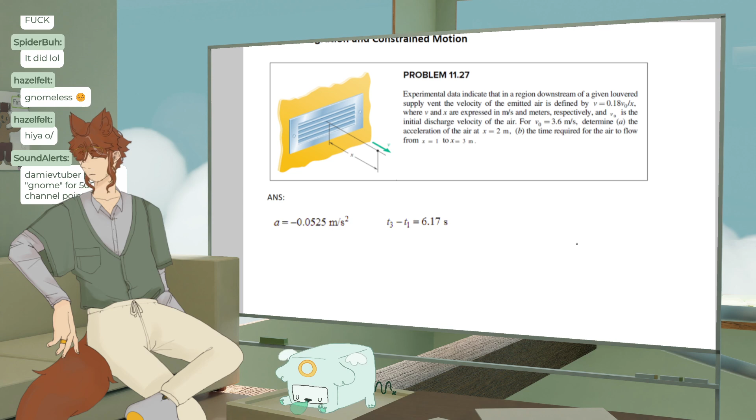Oh, Umbra, you have a question? What's your question? Umbra has a question. Anyway, hey everybody.

New quarter, new classes. How? How what? How did I get here? How did we get here? Great question, you have to go back a really long way to answer that question. We don't really know how the Big Bang happened, but okay, goodbye. Oh my god, Drown Him Friday. When? That's also a hard question to ask, but what is today? Saturday? Saturday at 3:35 p.m.

Oh shit, my Mix It Up is not up. Wait, you didn't get the full effect of Drown Him Friday. I also don't have any water. My god, Drown Him Friday Saturday, 3:35 p.m.

This is already so, you know what? This is just how it is. Here, I'll play it for you. You know, just because I'm the best and I care about my chat. There we go. That works. I don't have any... I have to go get water before I start... you. Fuck you.

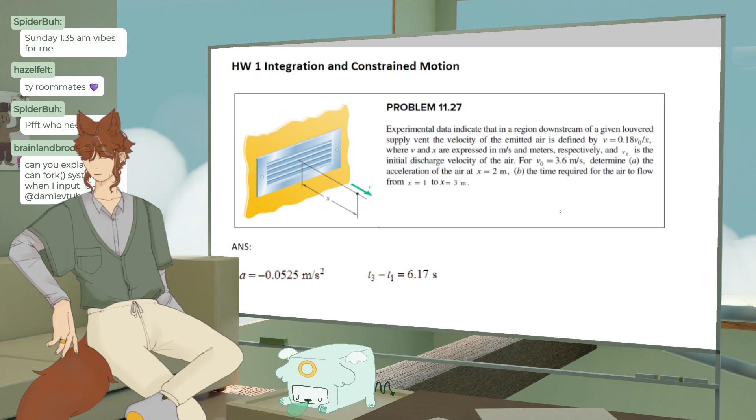There's a little bit of a primer about what this is. Let me explain what dynamics is real quick. So dynamics is like if you took your physics kinematics class, like your constant acceleration equations, and then you put those on crack cocaine, and you put calculus in there, and you just said, fuck it, let's just make everything a function. So we're just gonna have a lot of differential equations that involve derivatives that we define things as.

So our three equations are gonna be like: A is the derivative of velocity with respect to time. We have velocity is the derivative of x, position, with respect to time, and then we have a ds equals v dv, which you can derive from these two up here. So those are our basic boys, and we're just gonna get real.

Sounds like fun. It is actually kind of fun. You get real abstract with it, but we have this problem about a vent. So let's see, we have a region downstream of a given louvered supply vent, the velocity of emitted air. So we have a velocity function. It's based off of its initial velocity. So we could probably set that.

Oh, that's too zoomed in. We could probably set that initial velocity. We've got v equals 0.18 VO over x. So it also depends on its position. And we have an initial velocity, so VO equals 3.6 meters per second. We want to determine the acceleration for a certain position and the time. So we're going to do some integrals. Let's see, let me see Blake's question real quick.

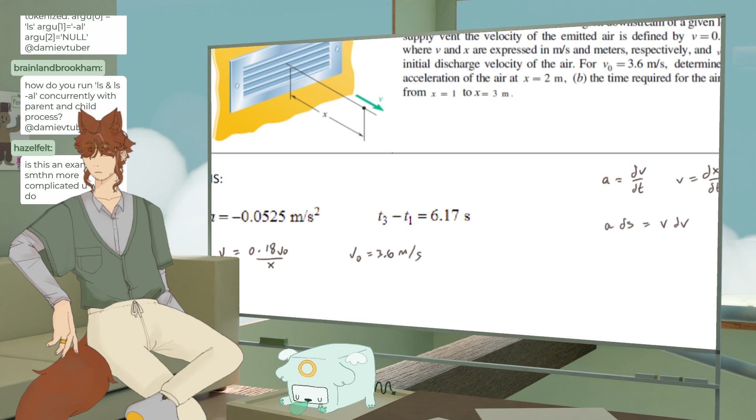Blaine? I just like to take viewer questions. Blaine is a CS major, I do a little bit of CS but not as involved as they do, so sometimes I just jump around. This dynamics problem is more complicated than some of the stuff up on my YouTube right now, because my YouTube is in the process of being caught up with the present day.

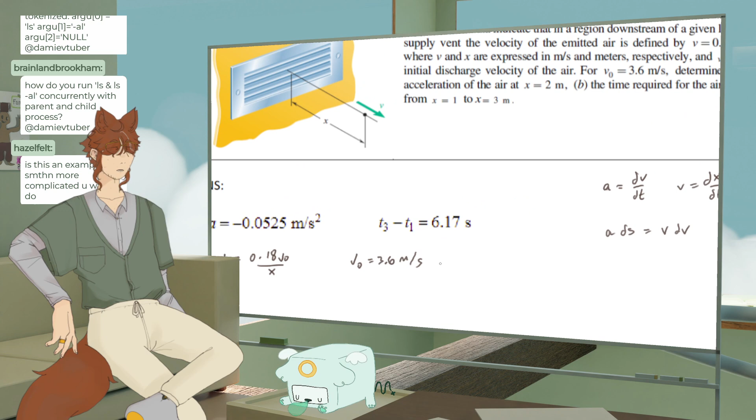Alright, so we're trying to find for A, we want to find an acceleration at x equals 2. We want to know what that is. So we know that acceleration is the derivative of velocity with respect to time, but looking at our equation here, we don't really have time, we have a position. So I'm going to try and do a ds.

Deemer, that's me. Hi Clem. I'm so sad I didn't get to stay for all your stream yesterday, I was called by the lions, by the actual real life lions.

Actually, we might need to do... No, don't be sad, it's okay.

Wait, if I take the derivative of this with respect to time, we would... Oh wait, big brain, never mind. I think we're chilling actually if I do this. A equals dv/dt, so if we take the derivative of velocity with respect to time, we would get...

So we have 0.18 V0. This is a constant, so we get 0.18 V0, or V initial.

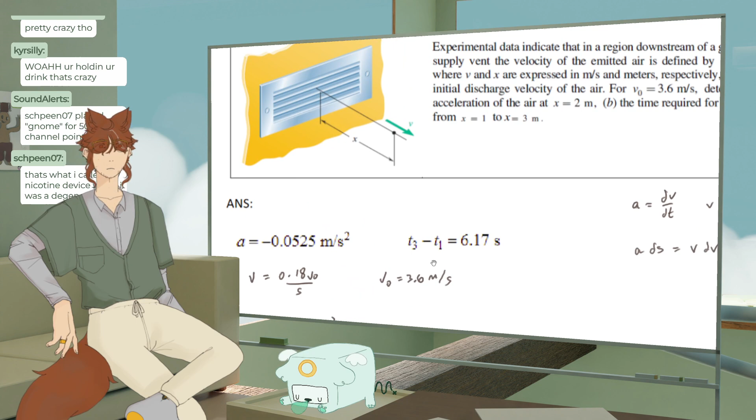Okay wait, no wait, for V0 equals that. No, we definitely need to get that V out of there. I'm not a fan of this V right now. Why is this so weird?

Because, okay, let me back up. Let's take it slow, we're getting through it. So to get to this place, we basically say okay, we take A, I think, and we say dv/dt, we're gonna multiply that by ds over ds. And ds/dt becomes v. So we get A equals v times dv/ds. That's the proof of that.

But when I was doing this on this problem, which we can check out, I was using this one. I was integrating it though. Also, you solve for k. I was pretty proud of figuring that out, but that's neither here nor there. Not a particularly impressive revelation, but in my heart it was impressive, and that's kind of all that matters to me. So this one I was integrating, and A was a function of velocity, and so these V's kind of scrunch into each other and create that function.

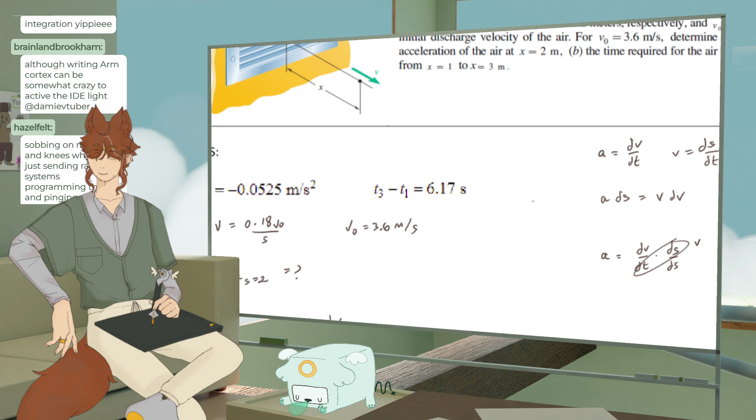Sobbing on my hands and knees while you're sending random systems programming things and pinging Damie. This is just how Blaine is. It's funny because Blaine has been around for a while, not just some random person. Our degrees matched up pretty well for a while, but after a point, because I'm mechanical engineering, his software degree is a lot more software-focused, since you found my math streams and we were doing very similar things. But yeah, I just think it's funny. Uh-oh, I got a negative seconds. That's not good.

Oh wait, okay good, it's just asking about the delta, so T3 minus T1. This is Brandon's thing since forever, it's beautiful. Yeah, I really think it is beautiful. I mean, and I can, because I'm pretty good at coding.

I'm pretty good at navigating the internet alleyways, so to speak, of how to find something. So even though I can't answer the questions, I can give some help. But I like hearing what he's working on always. And honestly, if you're in any degree, I always like to hear what people have to say about stuff.

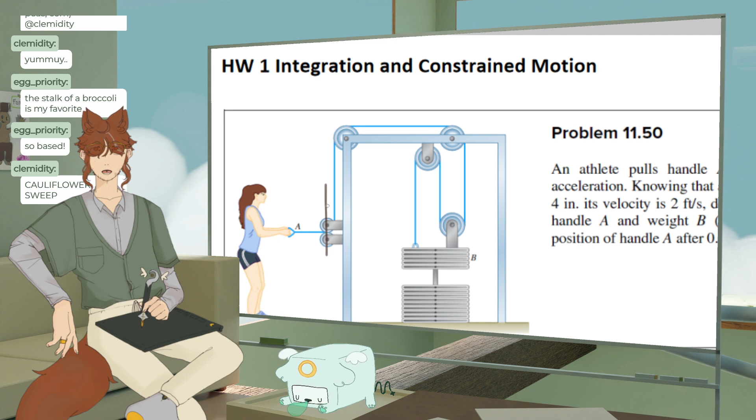So this is a type of problem called, is cauliflower better than broccoli? Oh, that's a take for sure. I'm not sure, cauliflower is just the broccoli stem, but all of it. The cauliflower I had was like, it was fine, it was very close to broccoli.

Potatoes are a classic, but potatoes are not a vegetable to me. Potatoes are like a different thing. Potatoes and corn are kind of both in the non-veggie space to me. Maybe that's just me though. Potatoes are like a pasta but from Mother Nature. That's so true.

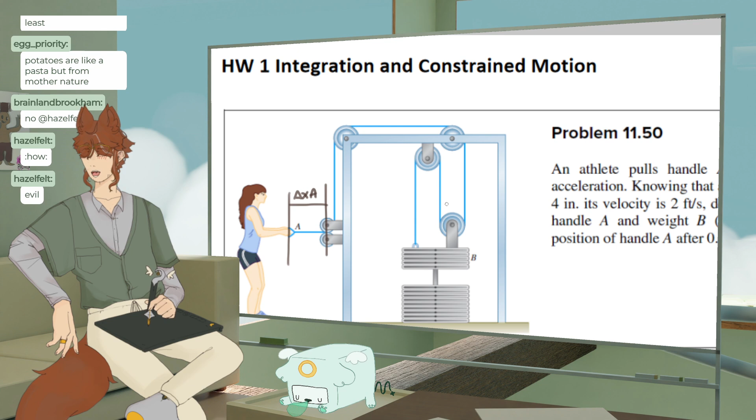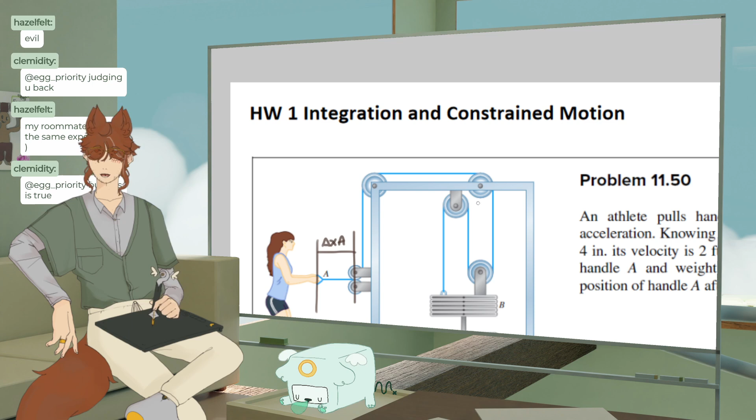Did they make you take a C course beforehand? No. Blaine's college also doesn't teach him anything. He has all these weird online classes that don't teach anything. Right? Am I incorrect about that? I think I remember this.

Okay, yeah, this is gonna be what kind of determines the... is it?

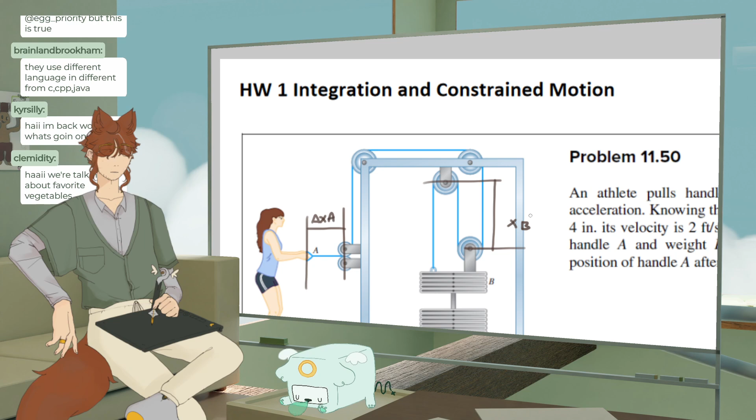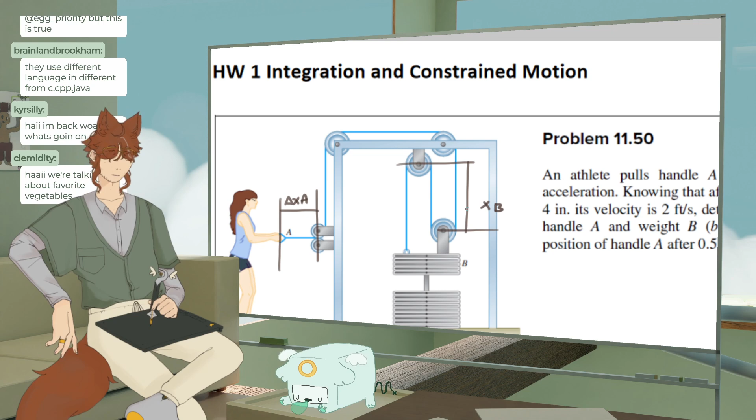I'm back. Whoa, what's going on? We're talking about favorite vegetables. I'm also doing a problem called a constraint problem. It's about sort of taking variables and having their relationships with each other.

Some people are experiencing the joys of college and the joys of adulting, and the costs. It's hard because I'm weird, you guys know me. I like thinking about math and stuff in a weird way, and it kind of sucks because no one in college is weird. Everybody is really boring, and they're like, I like math because I like putting numbers in a calculator. And I'm like, no, I need the numbers to kiss, okay? They're like holding hands and they're frolicking. Oh yeah, and Damie's doing math, I guess.

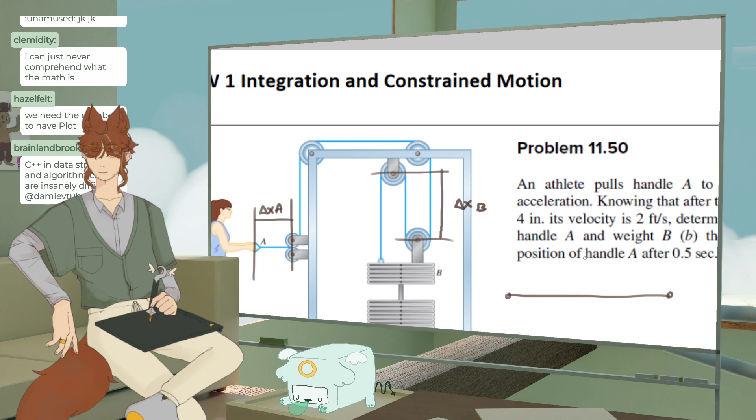I can never comprehend what the math is. It's okay, this one is kind of really weird. Basically, the idea is that the foundation of this logic is you have a cable in this problem. You need the numbers to have plot. You have a cable in this problem, and when you pull on one side of the cable, the rest of the cable will get shorter.

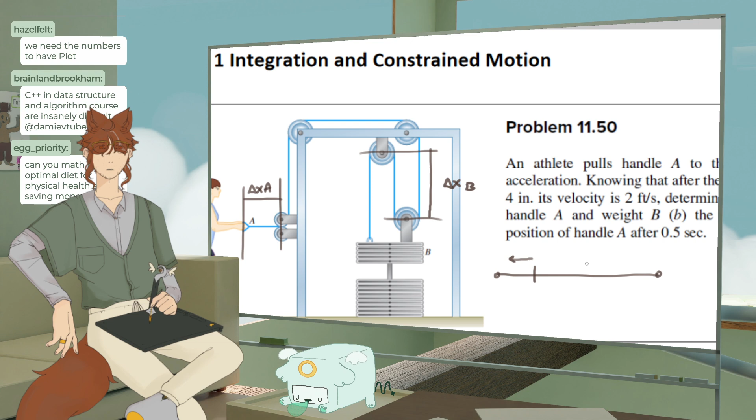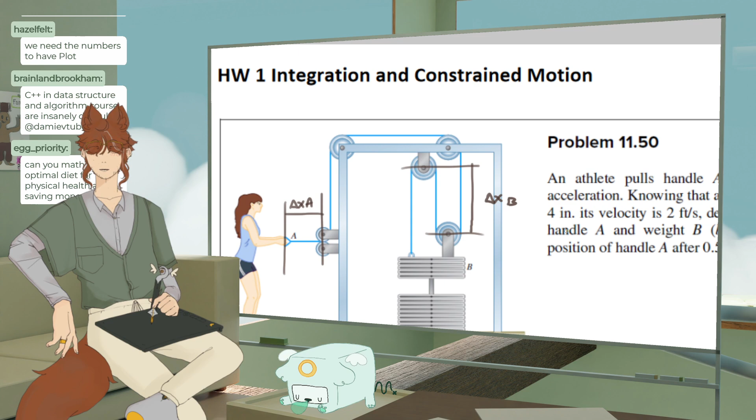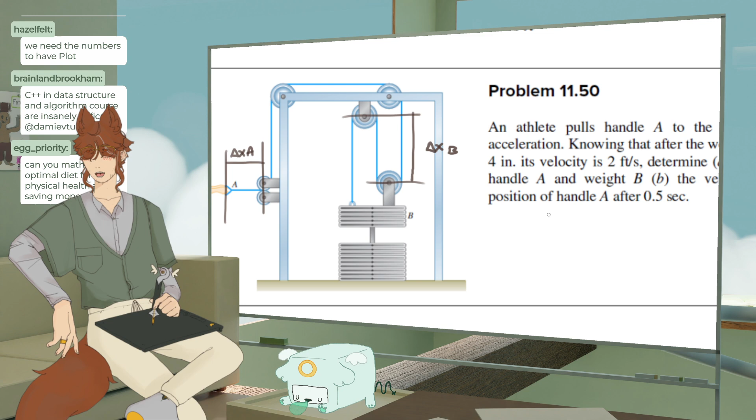Can you math me the optimal diet for physical health and saving money? Oh god, cost analysis is not my forte. I'm like the kind of guy who's like, you know what would be really cool? What if I designed a fridge that had a glass front and stuff, and it was small, because that would just be such a cool item to have, and then I don't think about how much that would cost, and I just don't think about it. And then it never happens because I hate cost analysis.

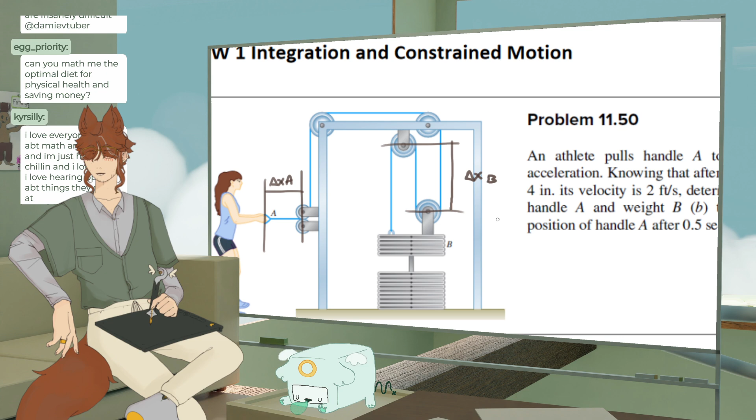I love everyone talking about math and stuff, and I'm just here chilling, and I love this. I love hearing people talk about things they're good at. Yeah, I love that too. I like it when people come in and talk about their majors, especially because I'm not actually a math major. I'm an engineer, so it's really cool to hear math majors talk about stuff too, as we get a lot of math majors.

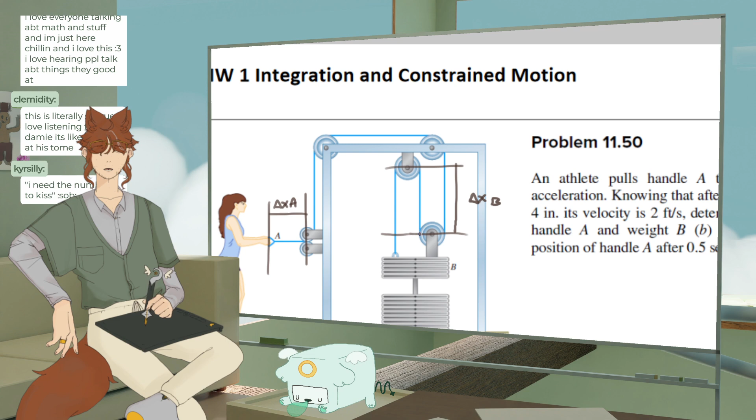It's like a wizard at his tome. I love that. That is exactly when I was like, okay, how do I kind of think about how I would teach math to people? It's literally just alchemy, that's what I think of it like. It's like, okay, so we have this problem, and we're gonna do a spell on it, okay? We're literally gonna do a spell where we say, alright, we have 3 of these distances. We're putting this in my wizard's brew. The length of this rope equals the distance of X sub A, plus 3 of these distances plus other stuff, and then that's our fun potion.

Like, if you shave off your apartment's drywall gradually so your landlord won't notice. What is that in relation to? Damie Arcane Wizard Arc, exactly.

Do I have a GitHub page? I do, but there's nothing on my GitHub. Oh my god, so really funny story, I have a video game that I made. It's a small video game, but me and my bestie in high school, we took a year and made a video game for one of our senior things. And that's like the only thing that's on my GitHub page, I think, stuff from that era.

It was so funny because it was a pixel art game and I was sharing the files over Discord for the art, and we put them in Unity. We were using Unity and I was like, why are these so rasterized? Why are these pixels not crisp? And it was just Discord compression. So we were like, okay, we're putting them in GitHub again.

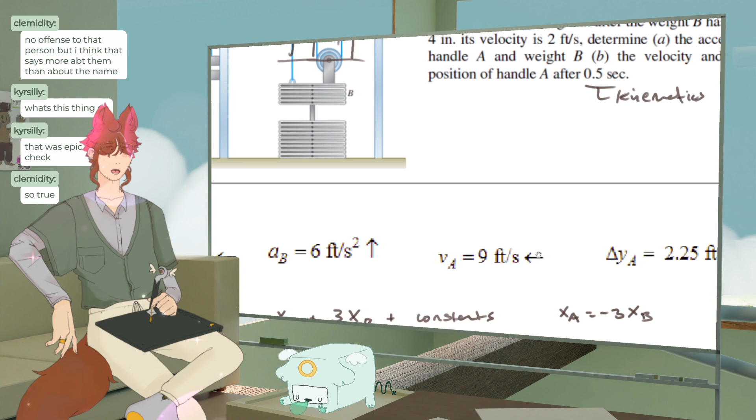Because the only thing I was tripping up is the length. But essentially, XA equals -3 XB in terms of the chain, like in the delta. Because when you do the delta, yeah, so when we say the delta of stuff, then we would say length minus length. Maybe not, don't - this is right, I think. Okay, so delta XA equals 12 inches? Feet? Inches. Okay, so now we have to convert things.

The delta is that, and we know that the velocity is VA equals -6 times 12 feet per second times 1 foot is 12 inches - not really how I should write that, so write it over here, 12 inches. Okay, and then we have kinematics.

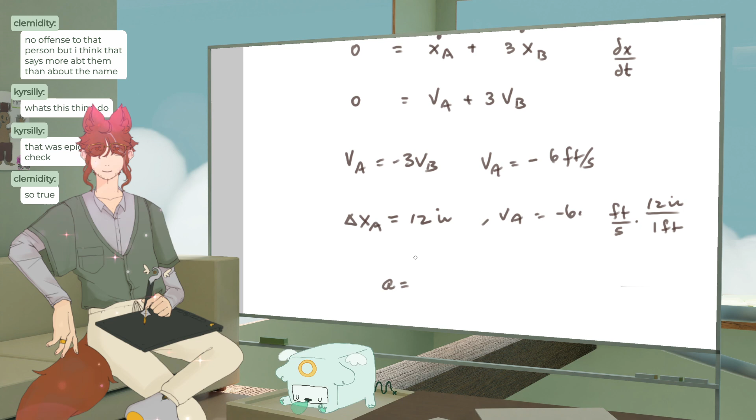So A equals... my brain is not working. It would be over here that I wrote this down. I think it's the change in velocity over the change in... I don't know. Don't look at me. POV, I just turned my paper right into your face - you're studying next to me and I slammed my paper right into your face.

Where did I write these down? Oh, right there. V minus V0 equals A times T. Wait, but I don't know how long it went for. Wait, okay wait, I remember - I'm remembering, it's this thing where we only have two, and... I've gotten worse at explaining things. Constant acceleration equations, there's one equation which is this one: V squared equals V0 squared plus 2A delta S, delta X - I've been using X in this problem. We can use this one, I think.

This will be 6 times 12. 5 times 12 is 60, right?

Literally so sparkly. I love being sparkly. I enjoy being sparkly and evil at the same time. That one's a fun combination.

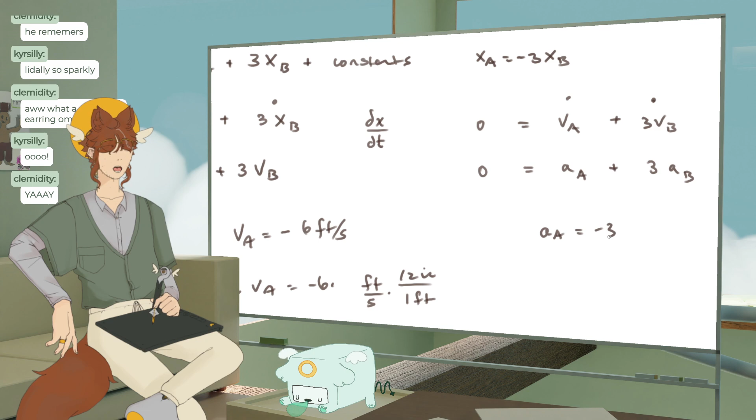So smart, Damer. Sorry, I'm a laugher. I'm the smiler, the sniler. Your little gremlin laugh, my One Piece laugh. That's what my One Piece laugh would be.

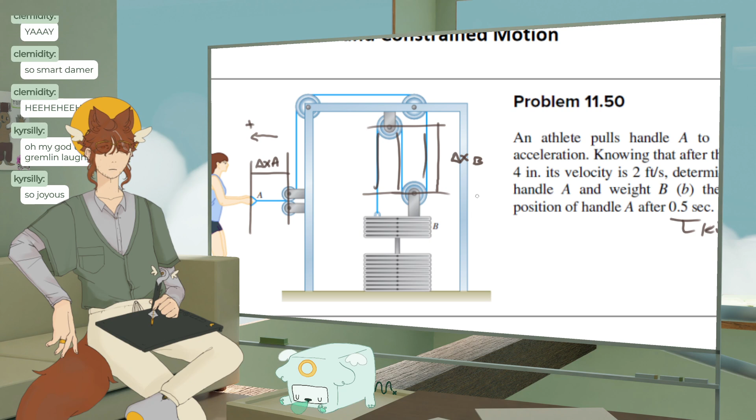Okay, so I can't use negative, because in this sense, this is positive, which is kind of odd if you think about it. I don't know how much I like that, actually, I feel like that sucks. So joyous, so joyous. That's positive, and then as you pull that way, then B would go up, so up is also positive. So if B is speeding up, it would go up. Yeah, okay cool, this is why the sign thing is weird.

Can I be a hater for a second? Okay, I'm gonna tell you guys some inside jazz.

Well, let me be a real hater on main, okay? So, I was in statics, right? Statics is about, like, you take a body, some sort of thing, I don't know, it could be me. That's me, apparently, okay, that's me. You take something and you put a bunch of forces on it, and you like do stuff to it, and you could like spin it around or whatever. And you're trying to figure out, like, okay, if we want to put this and have it not move around, like have it not translate or have it not rotate, then what sort of extra force do we need to have to keep it there? Or sometimes it'll be like, this is the direction of the force and how big is this force, right?

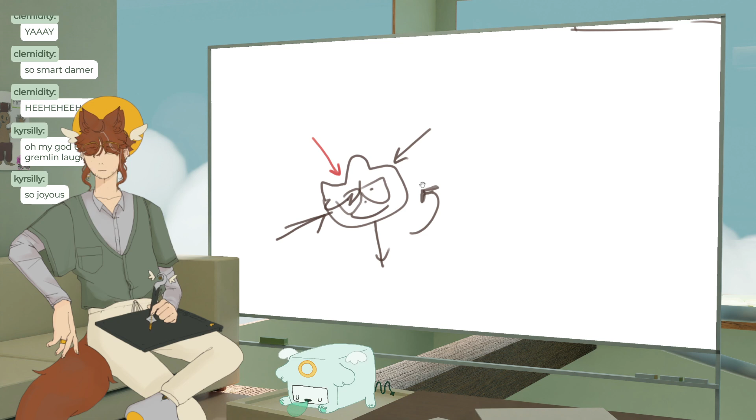And my professor, God bless his soul, he told us, okay, when you have a free body diagram, try and draw the arrows in the correct direction. So if you think the normal force is going up, don't draw it down like this, because your math is going to be weird, so try and draw the arrows in the right direction. The only time he told us ever to not do that was when we were doing trusses, and if the truss looked like something really weird or really bad, he was like, just guess and say it's one way. But if you're doing a joint analysis and you have a thing here and a thing here, and you're trying to figure out which way this force is gonna go, usually a lot of the time it's like this, one force, right? There's a load on this, and it's kind of like a triangle or something, and you're trying to analyze this joint, and you have these two forces. It's like, okay, so this one has to go down, so this one has to go here, and then this one has to go here, right? You're trying to guess the right way.

The two classes I have this quarter, I have this class, which is dynamics, and I have this class called, it's a civil engineering class, called Mechanics of Materials. The Mechanics of Materials class is basically about, like, if you have a really thin, long thing, and you put a force over here, how much it becomes goofy, how much it deforms.

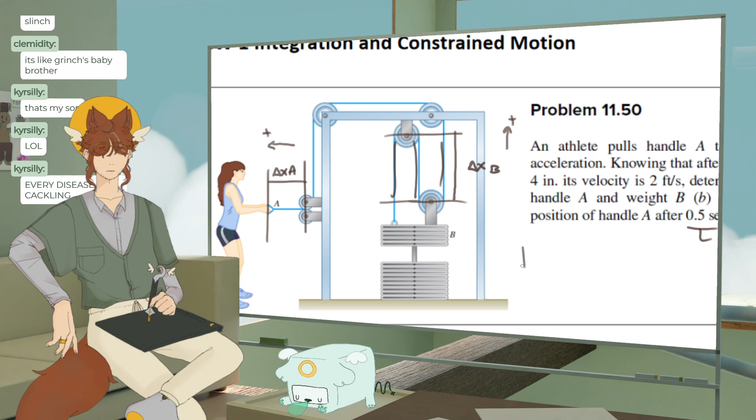I don't know why they said delta y, because why would that be y? Why, that's the evil axis. That's literally the evil axis. This is always x. Fine, I'll do this. There we go, delta x. I don't know why it said y, that is evil. Feet left.

Please don't kill Slinch, let him live. I hope your professor loves it. I feel like my professor would really...

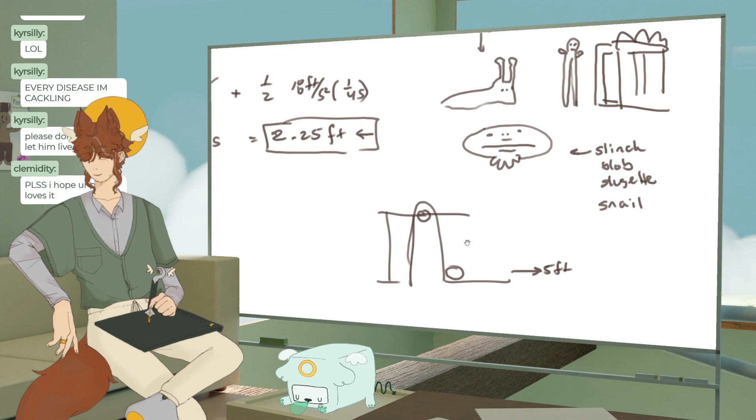It looked like this. So the cable went around a pulley, and then it went around another pulley. She was like, okay, what's the distance, if I pull this one 5 feet, what's the distance that each of these changes? And we were like, 2.5 feet, because you take this change and divide it by 2. And she was like, no, it's 5 feet on each one. Then she was like, wait a second, let me check my notes. And she was like, no, it's 2.5 feet.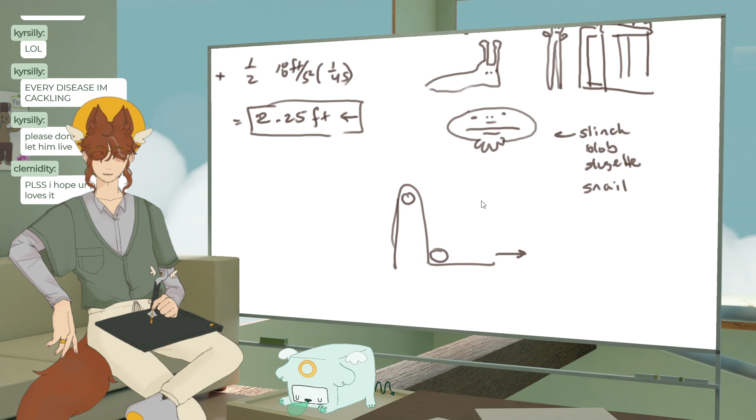It's literally a mistake I would make on stream. She's great, I love her. It's also just nice not having like a 72-year-old white guy as professor.

I think she would like Slinch. I hope she does.

Oh my god, yeah, we had an in-class test thing, and she set the password as this, like an evil emoticon face.

She's also the same professor who made jokes, because it was a detailed drawing class, so we had to do Slinch has every disease. He does, unfortunately. Not like my other awesome son, Skin Boy.

We had to do a lot of tolerancing, like fit calculations, which implies a hole and a shaft.

There was one day where she was just like, guys, I can't make this funny, I gotta make a hole joke. And we were like, oh my god. She tries to make little jokes and things. She's so Twitch streamer, it's awesome, I love her.

I don't even care about the dynamics part. Although it was really funny, the other day she was trying to explain acceleration to us, and I was like, I think we know what acceleration is, Professor.

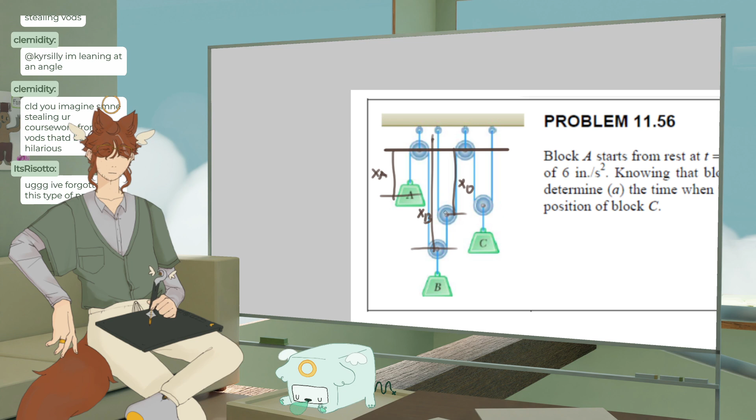So this thing is gonna move. It's gonna have a position. I'll just call this X. Call that 0. And then C is also gonna move.

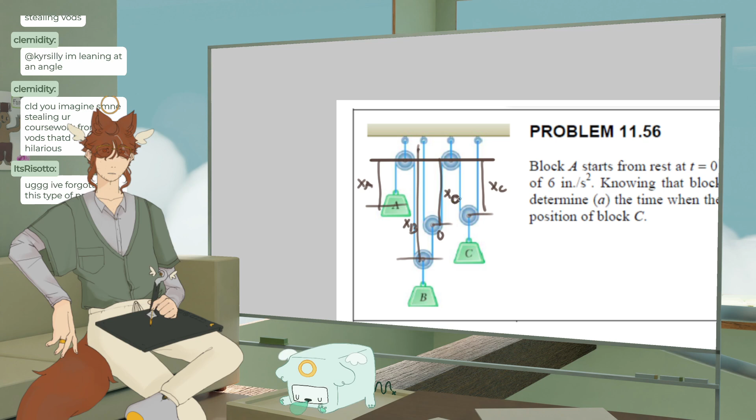Just so you know, we get some terminology in here. Alright, so now we have to write the dependence relations. So let's start with, we got 2 cables. Let's call this one 1, and this one over here 2.

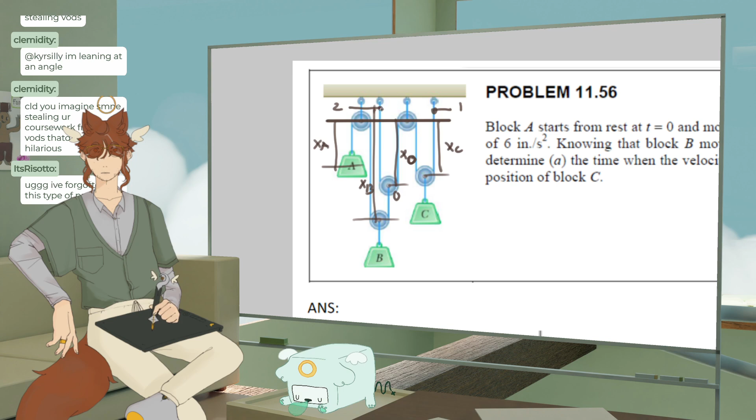Bad, wow, this looks bad. This looks unfortunate. There we go. That's a little bit marginally better, but it's pretty bad. Yeah, now see, I just pointed at the same one. That's not very good, is it? There we go, that's 2.

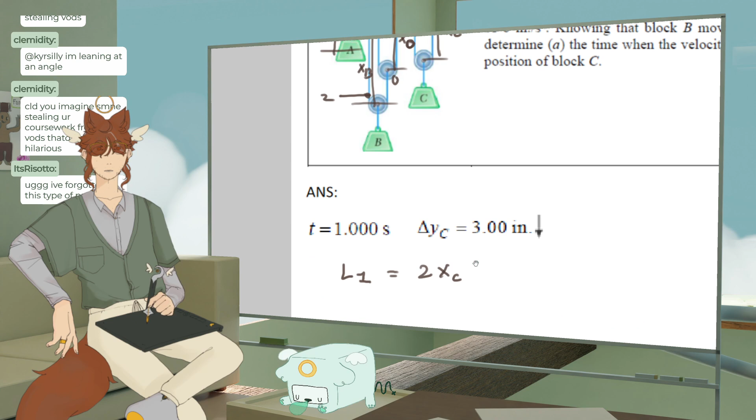Okay, so we're gonna say L1. So what things do we have to add to get to L1? Well, so C is gonna change position. This is always gonna be a constant distance, so we don't really have to care about that. So C, that's gonna be 2 LC, right? So we go here and then we go here, so that's 2 of the LC, so XC. And then we've got this length here, which is going to be D, and we got 2 length D, XD.

Can you get a screenshot of Slinch? Yes, 1 second, let me go back to Slinch for you. I cannot believe you want to draw Slinch. He's scary, I don't like him. I have a lot of creatures that I employ on my channel, like this fellow. I can't even draw him very well because I feel like he's going to come back and then we have to burn the whole place down again. So excited to see Slinch fan art. You don't like him? He scares me. He scares me. I've never used a Slinch before.

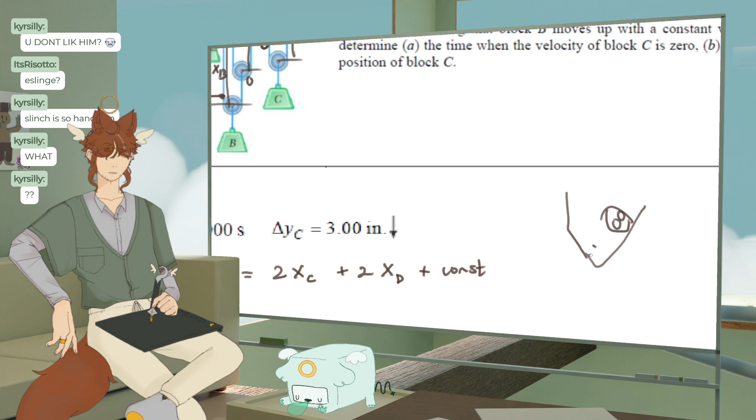Although it is a very fun name to say, and I do enjoy it. Slinch is so handsome. Okay, sure. Can we get like yaoi fan art of Slinch? Like drawn in the yaoi style, just really shoujo it up, you know, like, oh my name is Slinch. I'm going to my first day at high school. Sorry, I have to get his lips in there because that's Slinch. He's bald because he has no hair. Zero hair.

Thinnest neck you've ever seen. Biggest hands you've ever seen. You know, Slinch, my son Slinch, who I hate, who also has every disease. I don't think those two are related. The disease thing happened after.

Let me DM you some. I never, it looks like the Horse Guy visual novel. Can we? Oh my god, Slinch redraw please, over the Horse Guy. I forgot about the Horse Guy. I can't believe I forgot about the Horse Guy. He's awesome. What is that called? I know exactly what you're talking about. Horse Guy visual novel, it was a game, right? Or are we talking about the same thing? My Horse Prince. Yes, yes, yes. Wait, it just autocorrected to horse and gay visual novel. No, My Horse Prince, please. It was not gay, actually, it was very straight. This guy.

That handsome Slinch. Wait, why is it not letting me write? Slinch. It's exactly him, except he needs to be bald. My spirit animal, the Slinch. I love this animal, the Slinch.

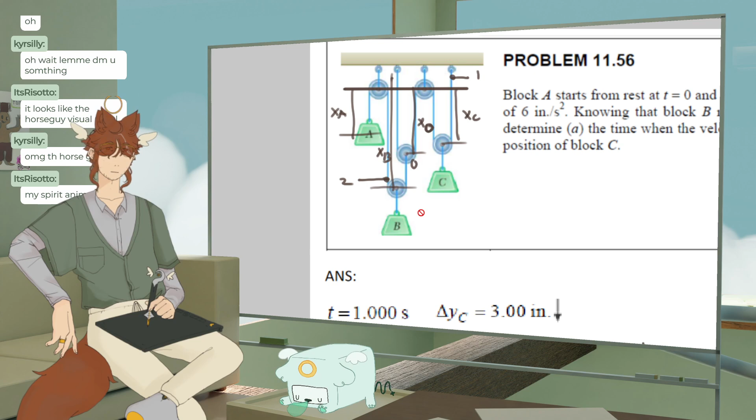Okay, so this length is gonna possibly change. That's xb minus xd. xb could also change, unfortunately, but we'll go with this for now. So xb minus xd, oh, I might need to have an overall length defined? Maybe not, we'll wait and see. We got xb, oh sorry, xo.

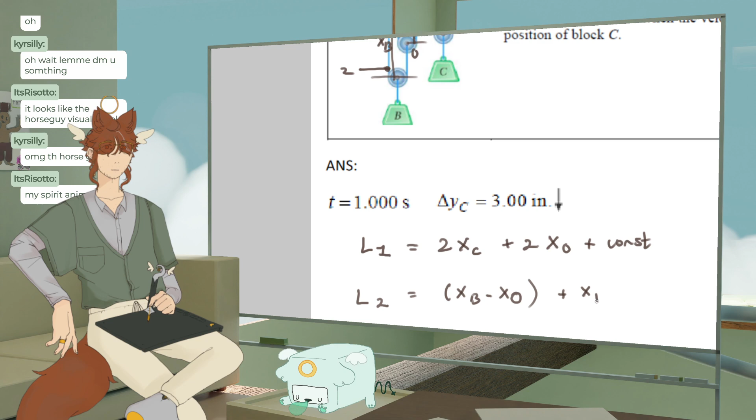That's not xd, lol, me confusing myself. That one, and then as we go up here, that's just xb. Oh no, we don't, I'm chilling. It's just gonna be 2 degrees of freedom, because, okay, it's kind of funny, because the way they described this... I actually don't know if linear algebra is a prereq for this class or not, but basically the way that I think about degrees of freedom is like, okay, if you have, like, you know...

Because this is gonna be xb plus xa, right? This is our dependence relationship, it's gonna equal 0. I'm gonna just put c. Why am I gonna write constants? Get out of here. Actually, I'm probably gonna forget to write it if I don't write constants. Whoopsies, remember your c's and your integrals, guys.

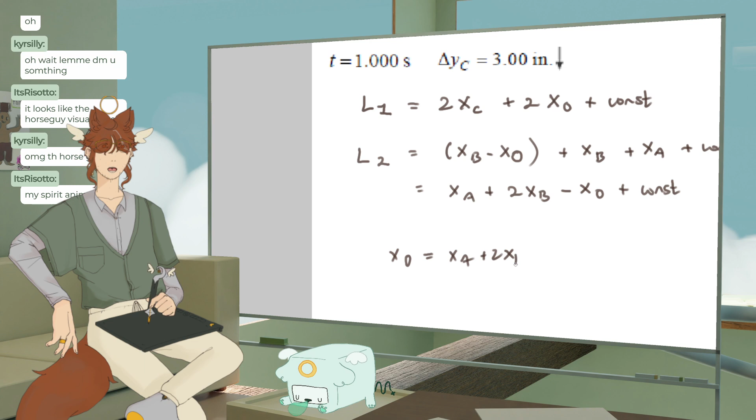Yeah, so if we write this out, we can say xa equals negative xb, well, this is 2. And I'll rewrite this, let's do that first. So we got xa plus 2xb minus xo, it's constant. So we can say xo equals xa plus 2xb, and because these are the 2 degrees of freedom, that's why it's 2 degrees of freedom. That's how I remember it, at least.

You have like 2 vectors that make up your... so if we were doing this linear algebra style, it would be like 1, 0, or sorry, 2, 0, xb, plus 0, negative 1, x0. And then that's where I assume we're going with this, but I don't know, it's just where I think of it in my brain, in the same way that I'm like, ooh, oh my gosh.

Okay, so we have these. The time when the velocity of block C is 0. Okay, block A starts from rest, I'm remembering the memes, with a constant acceleration. So we got, nice choice, we got a constant acceleration. So we'll just say A equals 6 inches per second squared, it's gonna move downward, so that acceleration is also downward. I don't even know, I want to do stuff, and then I don't.

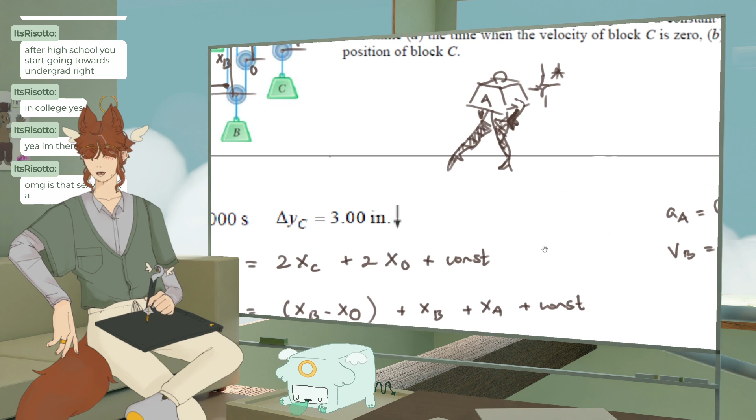Oh, did you not see the sexy block A? The sexy block A, my idol! Exactly, we all want to be like sexy block A. I love you, sexy A. It's like Jessica Rabbit to me. I'm not bad, I'm just drawn that way.

Such an icon. Okay, we need to find VA. So VA equals what? Easy A. Okay, so we know its acceleration, and we know that...

Okay, we want to find the time when velocity block C is 0, so VO equals 0. So VC equals 0, that's our constraint sort of. So VO equals 0, so this is 0 equals, here we go, plus 6. So VA equals negative 6.

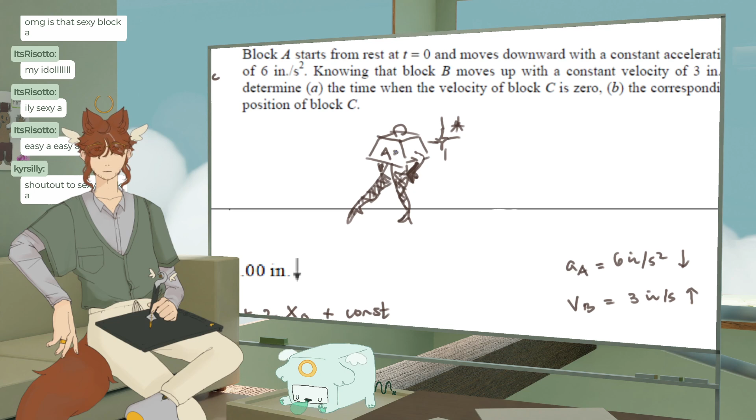And then we can back out our... Shout out to sexy block A. Dude, where would I be without her? I really want to draw like a little lipstick mark, it has to be small, like she got a kiss, you know? Just from someone, from one of us. Make your romantic haiku! To my dear Block A.

What is 7 syllables? That's a funny thing to say about A. Your velocity is way too many syllables, your acceleration has way too many syllables. Your change in speed is so hot. Please never stop being you. That's ode to A.

There we go, that's just how you do it. That's how a poet works. What can I say?

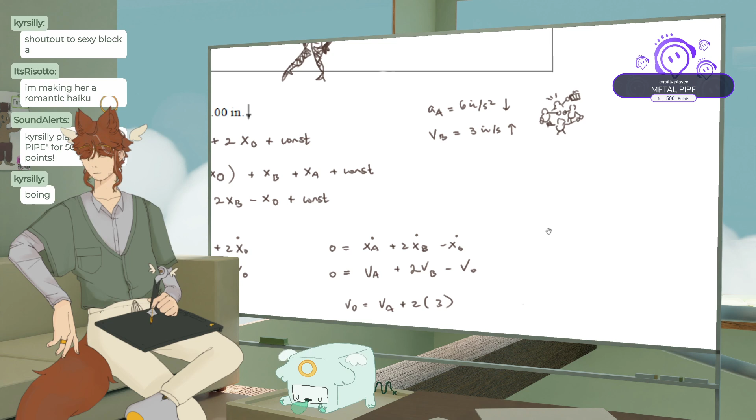It's just some kinematics, I could have put some kinematics in here. What do we have? We don't have time, we don't have position. Metal pipe. That's so apt, it's so apt, it's Block A's friend.

What was I doing? So we want the time when the velocity is 0. So we want something with acceleration and time and velocity. Oh, change in velocity equals AT. So change in velocity equals AT. We know our acceleration is 6.

I probably shouldn't get a negative here, but... oh wait, because it goes from 0 to 6, so it's 0 minus 6. Ha, signs. And then we have 6, right? 6 inches per second squared. We'll put an inches per second squared on it, times t. T equals 1 second.

I don't know if I saw the t equals 1 second up here. Oh my god, poggers, t equals 1 second. Why did they put that many sig figs on it?

What would I want more than the fast changing movement my heart does for you? I love you, Sexy A. What a beautiful commemoration to getting t equals 1 second. We're winning so hard, dubs all around. Here, I gotta draw A being proud.

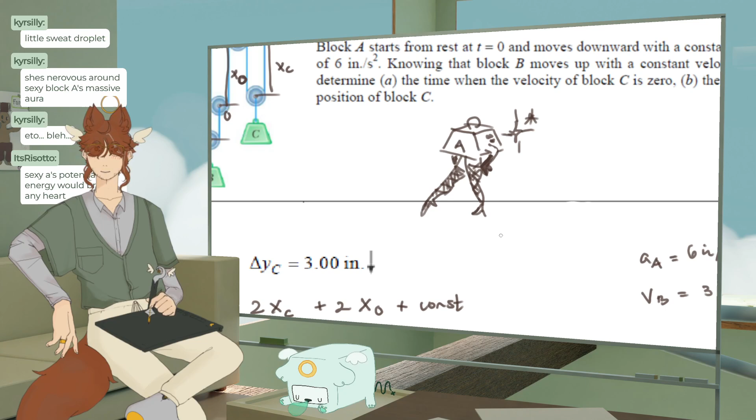The dynamics of cinematic universe, guys, you wouldn't understand the tension. Sexy A's potential energy would break my heart. Well, Sexy A is moving downward, so the potential's getting lower, unfortunately. But the acceleration? Yeah, constant.

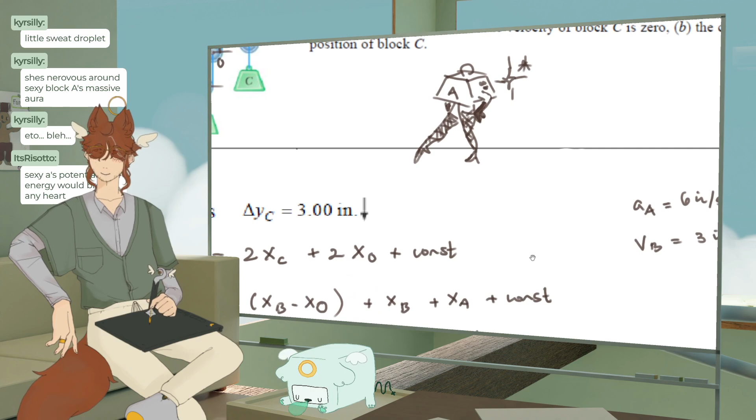What do I need to find? The corresponding position. Okay, so we need to find XC.

No, it wouldn't get lower. Well, depending on your reference point, it could get higher. She never goes down, she only goes up. I hate to break it to you, it does say moves downward. She is moving downward.

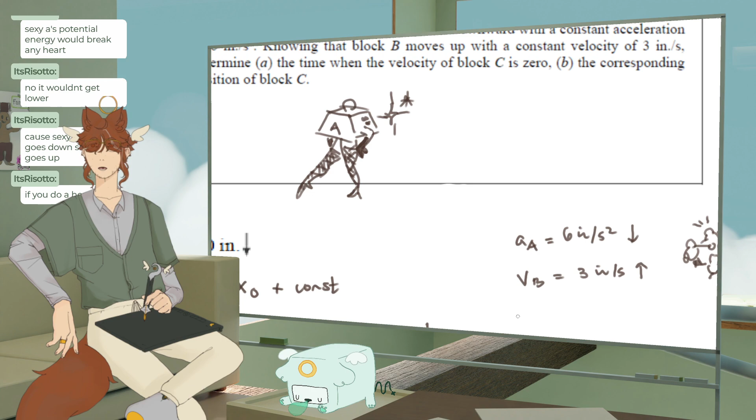Okay, let's. Yeah, so we just need VO, and VO is VA plus... Okay, VB is a constant velocity. We now have the time, so we can get the position of B. So VB equals right... 3. What was that?

3 inches per second. Inches. Started writing meters at some point. Not the same thing.

I'll definitely draw that. So 3 inches per feet. So XB equals 3 inches per second times 1 second equals 3 inches. So now we need VA or XA. XB equals 1.

Never, that's her rival, Blocky B. I feel like A, it's okay, she's going down but like she's chilling, you know. Block B, I feel like B is like nowhere near. Well, okay, I guess they kind of are rivals. Actually, you're right, because B is going up. Oh shit, wait, B's going up.

The scrappy rival who's mad at the newfound love. An athlete.

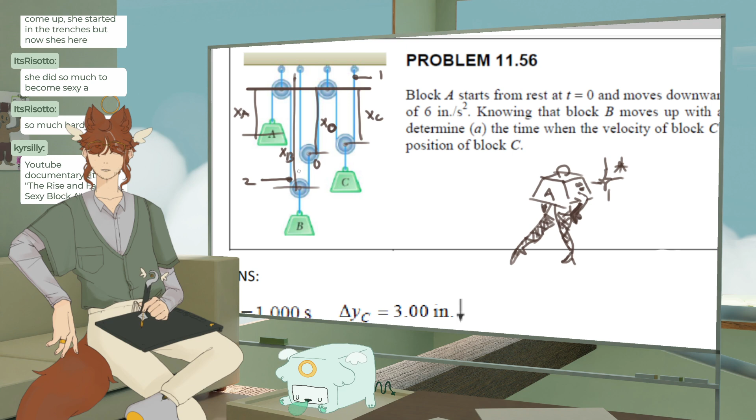I mean, yeah, she could just oscillate forever. It just depends on if there's external forces or not. Oh, we'd have to change the problem. Huh, okay, well that's kind of not particularly great.

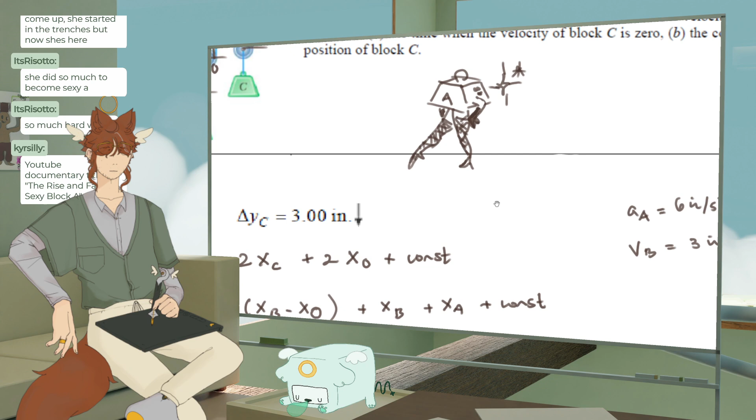Okay, it moves with constant velocity, it moves up. Oh wait. But delta B, xb is not... wait, what do I need to find? Oh no, this is right. This is right.

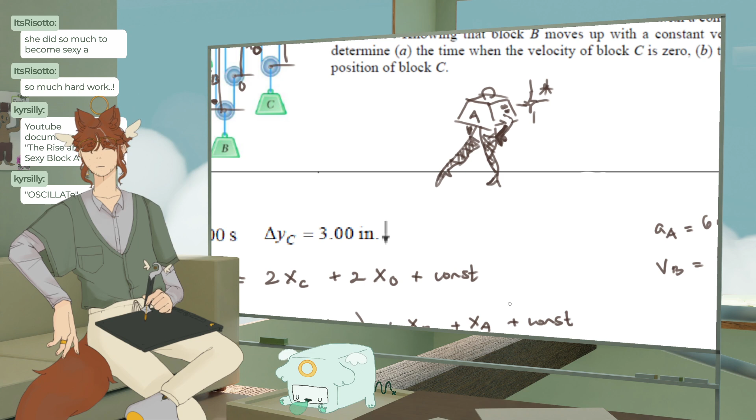Oscillate. Fuck, I don't know, let's see. No, because I definitely want to find the delta VO, because that's VC.

Okay, sexy A will get me through this. Let me think. Because I did XB, well all these have to be right because I used them to find this. So this relationship is right for sure.

Okay, maybe it's a sign thing. It's not entirely impossible that it's a sign thing. Because we have the velocity. Oh it's probably, yeah. V is down. Wait, what is 3? Which one is the 3? The singular 3 is A.

A is down, A's position moves down. So it's -3 because our acceleration is down. Yes, well okay, this is why we have to define directions. It's negative though, we know A moves down. So then this, and this is -3 plus 6, which is 3 inches, equals

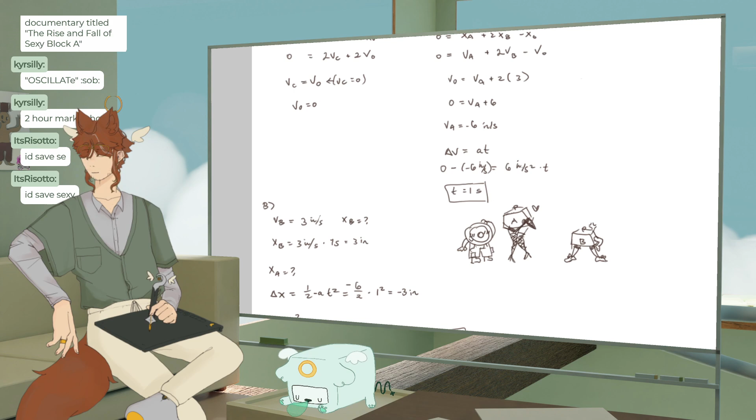I'd save sexy. Okay wait let's see. There's still a sign issue. I will say the signs in this problem setup I do not enjoy. I don't really... there is not a rhyme or reason.

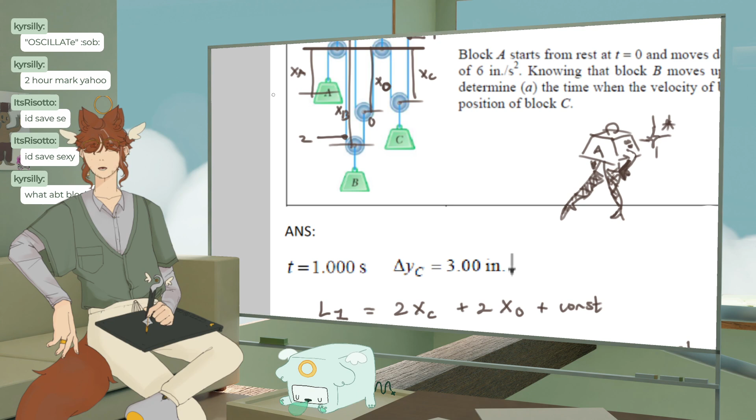Because if we say A, we know A moves down. Let's say that down is positive. So then in that case, B would be the negative one. Yeah okay, we're chilling. The acceleration is down, which is positive.

Cool, what about block C? What's his deal? Doesn't like the public eye? Kinda love that. There we go.

Negative, negative, so XC down. Okay yeah, they don't really put a negative on here, which is kind of nice.

They have like a stable life, you know? They're not too worried about anything. I do want to draw block A smoking, though.

Let's see. I like how her shape subtly changes every time I draw it. How do I draw it? Is she right-handed? She's right-handed for sure, just because I'm right-handed. I guess I could do like this, like this, like that, sort of. And she's got one of those long ones, you know? Like that, and she's got her legs crossed. I swear I'm doing math still, I'm in the math category.

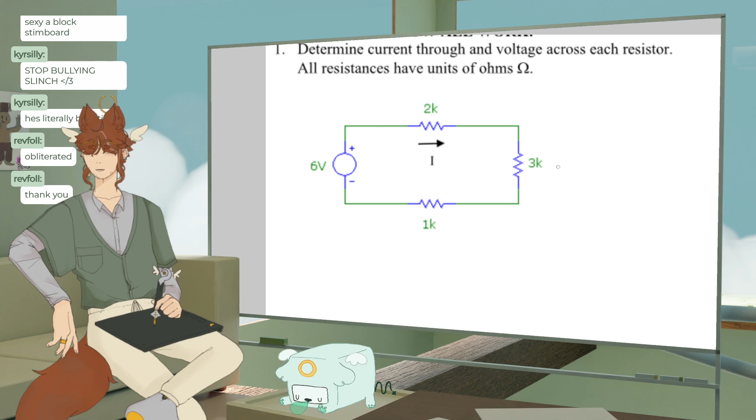Oh my god, this problem is so stupid, I might cry. Sorry, I really shouldn't say that. It's okay if you don't know what this is, also. But to me, it's stupid. What am I doing?

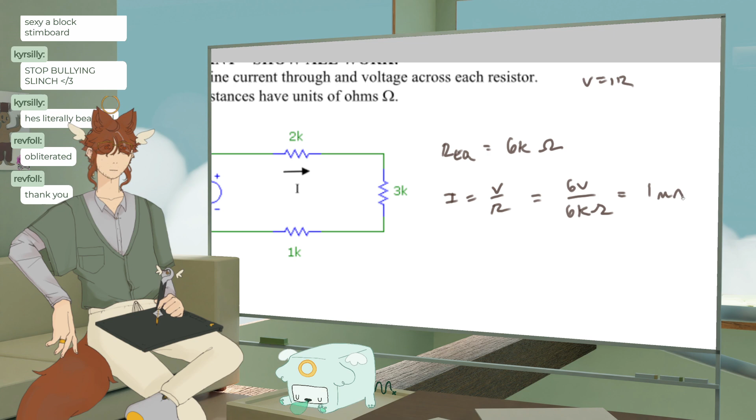Current. Okay, so we got 6 volts over 6k ohms, which is 1... it's like the opposite of kilo. Milli? I think. So then we just do, oops, amp. What's the thing? V equals IR equals, we'll just do it over here. We'll call this one R, 2k, I equals 1 milliamp. Voltage equals, well, we just do 1 milliamp times the resistance, which is 1 volt.

This is why I said I could speedrun this. That's 2 volts, I lied. Don't look at me. There's no, well, I mean, you could have.

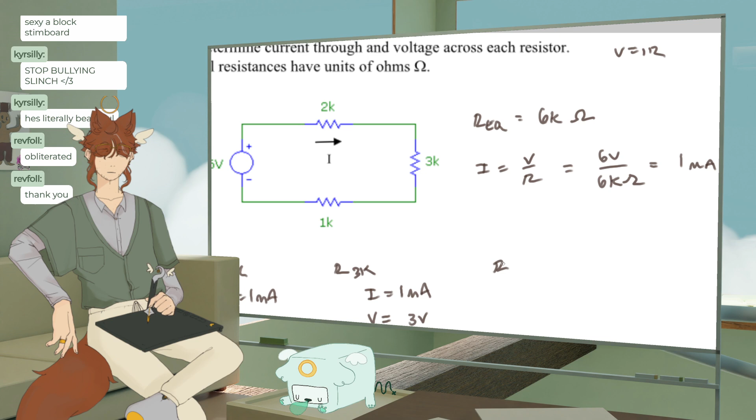Okay, when we get to a harder one, we'll see if there's any interesting characters in these problems, but these are a little bit too one-dimensional. It's bad writing, like a trash novel, you know? You can have a little fun with it, but it's not anything that's gonna change your life. You just kind of have to read it sometimes, because it's like at the doctor's office, dentist's office. But...

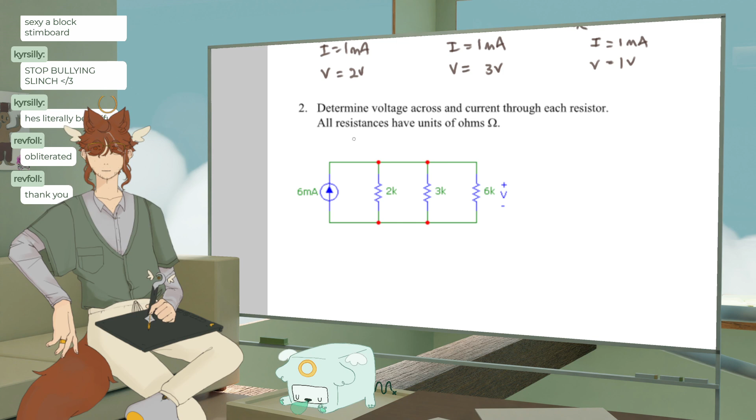There we go. Same with this one. We have 1 over 6k plus... thank you, thank you. Equals 6 over 6k equals, right, 1k, so that's 1 milliohm. Nope. 1 milliohm. Yeah. Wait, what am I talking about? 1 ohm? Wait, what? No, what's happening? We flip it. It's 1 kilo ohm. 1 kilo ohm.

Either you smile at sexy A or cry at crappy O. No, not crappy O. They're beautiful, they're both beautiful. That's the whole point. If you, no matter who you are, you can have your sexy A. You know? You know, it's just like that.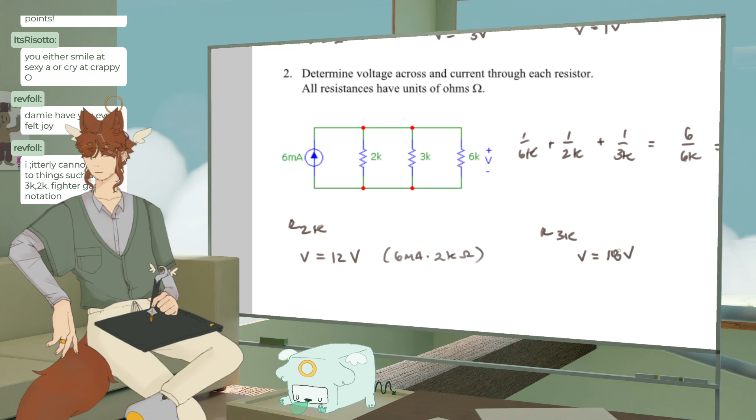I cannot listen to things such as 3K, 2K, fighter game notation. That's so funny, I don't think I'm doing this right. What am I doing wrong? I think the current splits at these, so it's not gonna be that. So I gotta do some work first. I gotta find the voltage, and then I can... they're all gonna have the same voltage. Yeah, what am I talking about? What is this bullshit? Get out of here. Get out of here. 6.

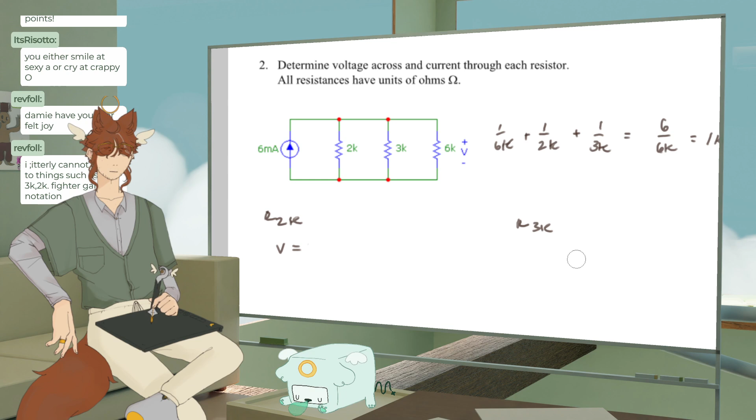So V equals IR equals 6 volts. 1 kilo ohm. Why do I keep saying ohm? Me and my ohm, my kilo ohm. It's a funny thing to say, but yeah, so voltage equals 6 volts. They're all gonna be 6 volts.

I blew up a resistor in a lab once. It was a little scary. It's just sort of something that happened. This stream is so epic, thank you. I just try and be a funny little guy, a little chill, little funny little guy.

Is that the Pikmin 3 title screen? It is, probably. I have a big stream music playlist with a bunch of different games. Yeah, it's Pikmin 3 title screen. Oh, mama. Pikmin, I love Pikmin, I wish I could play it on stream. I played almost all the way through 4, I've not beaten it yet, pretty good, I'm like at the post game. Been watching for 2 hours, couldn't be happier. Oh, you're so nice to me.

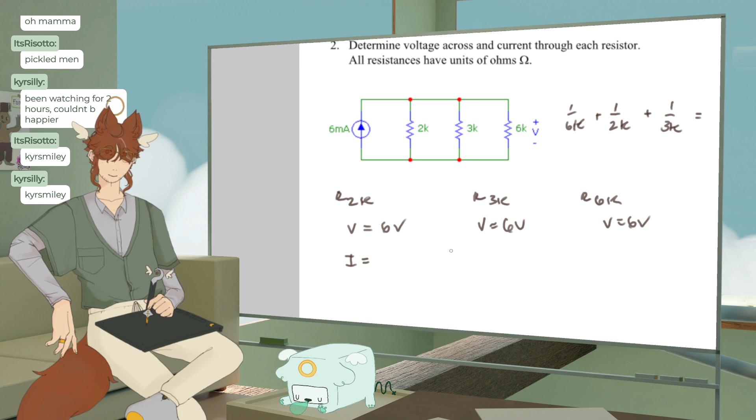I like to think that it's kind of not... I wish that, because the thing is, I have found other people who stream math, but they don't really have a good time with it sometimes. They're just very serious, like, oh, I'm going to do math now, or I'm going to do a proof, or answer viewer questions. It's like, I'm just here to fuck around and have a good time, you know? We're gonna do some stuff, you might learn some stuff, or you might not, who cares? You can also have sexy A, you know? You know what I'm saying? Like...

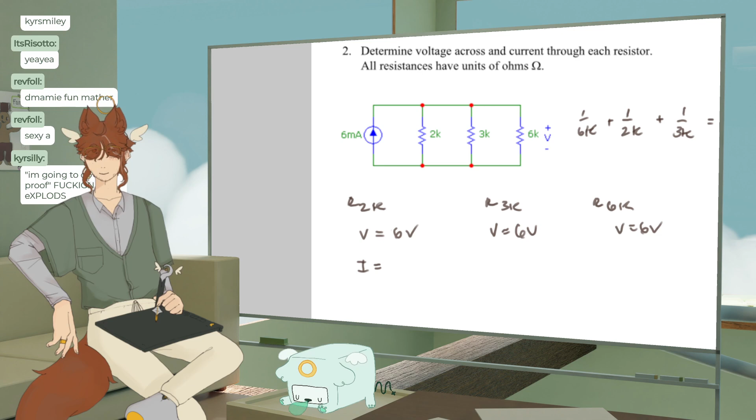V over R, so, damn fun, math, sexy A. Oh Rev, did you see sexy A? I'm gonna do a proof. Fucking explodes. Sexy A. I hate proofs.

I think they can be cool. They're just, it's hard to do them in an engaging way to non-math people. If you think about them as spells, or in a fun way, in a visual way, then they can be fun. But it's frustrating because a lot of people are like, okay, here's a thing pointing this way, and here's the infinitesimally small distance between these two vectors, and it points to the middle, and it's infinitesimally small... It's like, dude, come on, please.

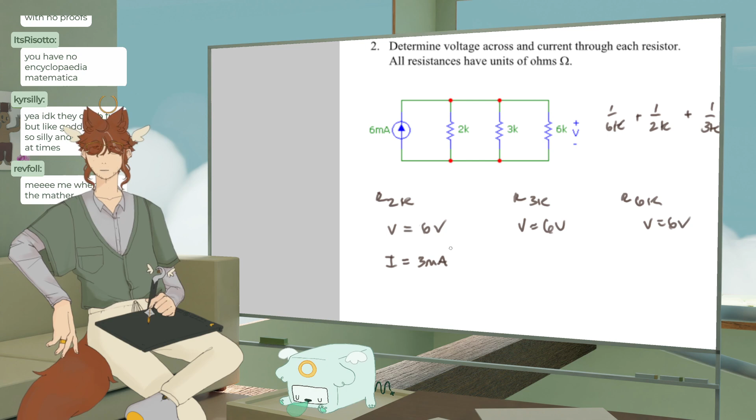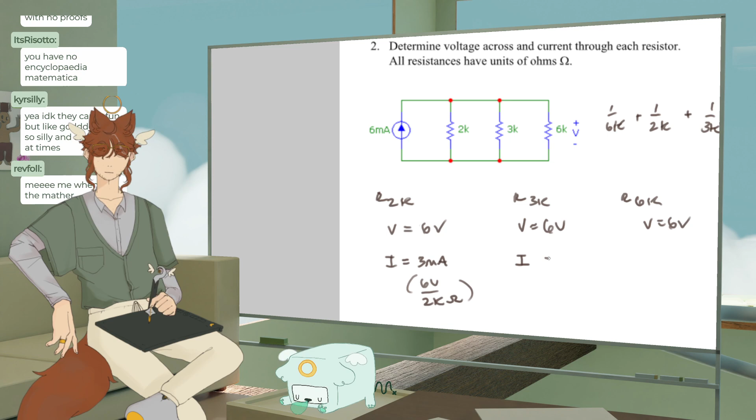But no proofs, you have no Encyclopedia Mathematica? Oh yeah, no, they're super important. But I mean, I like listening to more in-depth proofs if there's a person who's really excited about explaining them. Some professors I've had are pretty good about that. But it's just sort of like I can understand why people get intimidated and also kind of tune out for proof stuff. They're super important though, I love them. Also, they're very sexy.

Oh really? Like proofs? Prove 1 + 1 = 2. Okay, ready? Oh, yeah, this one comes up all the time. Are you ready? Okay, let me think of a good thing.

Let's just do a cat. Okay, so you have one cat, right? We agree that having just a thing is 1, right? We've colloquially agreed that this is 1. And then you have another thing, and that's also 1. Right? And then if you count them together, we agree that in math, our integers of full things, it goes 1, 2, 3. These are just names that we have for counting things. So 1 + 1 = 2. That's the best way I can say it.

Now I know the actual proof for trying to prove 1 + 1 = 2 is like impossible. It's not impossible probably, but it's insane. It's actually insane to me. No, proofs are a little scary. I can't do my own proofs. Genuinely just blew my mind, and it's wrong.

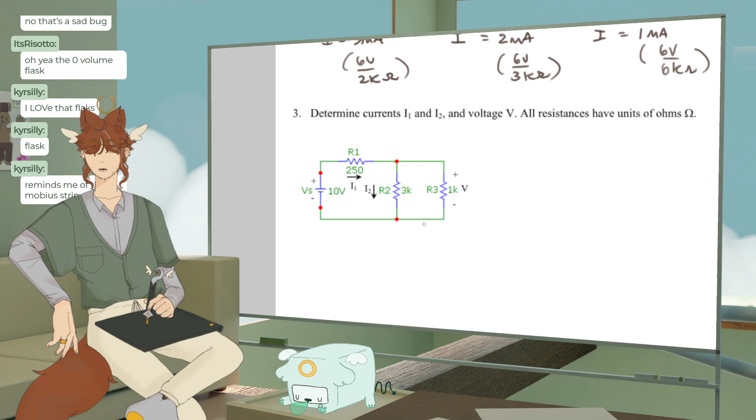Because I want to do more design, and the program I'm in has like 12 units out of 205 that are design-related at all, and it's not actual object design, it's like system design, and I don't really want to work in systems. But I still want to have a mechanical engineering background to go into more of the industrial design space, because I want to do CAD and stuff like that. So if I'm here, I'll probably do a math minor, but who knows.

I tried learning programming, then I got to the for loop stuff, in Y, for X in Y, and I understood nothing. There's no good explanation, like a for loop, or like functions.

So that's gonna equal, oh no, 1 over 1k, right? Be 4 over 3k? Wait, shit, 1 over 3k.

Yeah, for loops. It's just kind of weird. Basically you're saying, I want to do something 5 times. The first time is the 0th time, then the first time, second time, third time, and the 4th time, and you've done that 5 times. That's sort of the reason you want to do a for loop.

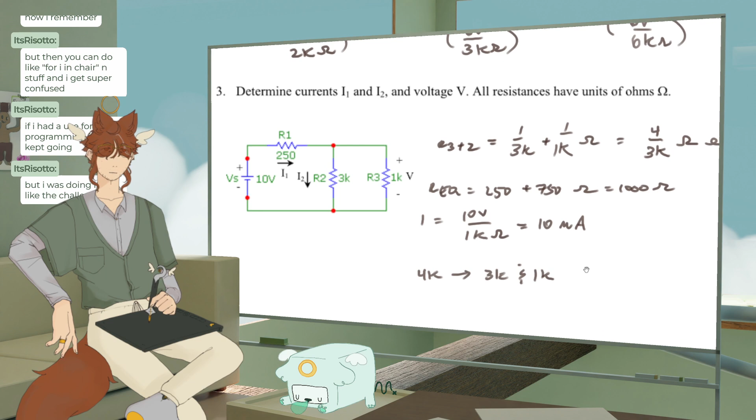We have 4k, and that's split into 3k and 1k because they're just in parallel. This is 10 milliamps. This is going to go to 7.5 and 2.5 milliamps. Ratios, baby.

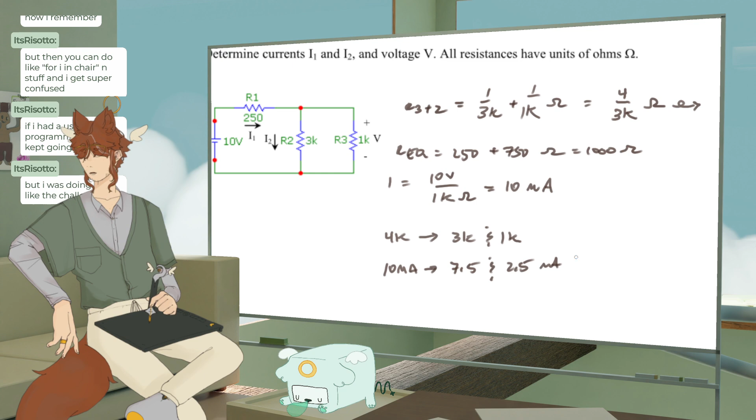Cool. So I1 equals 10 milliamps. I2 equals 7.5 milliamps. And V equals, where's our V at? Oh, V over there. Well, it's the voltage across that resistor, so...

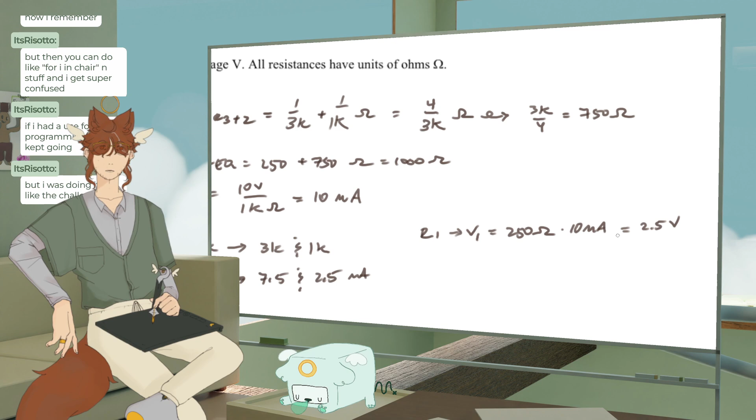R1 is going to be, so V1 for R1, V1 equals IR. Wait, 250 ohms times... oh, milliamps... 10 milliamps, which is gonna be, I think, just 2.5 volts, right? Probably, yeah. Getting a little bit better with my... so then...

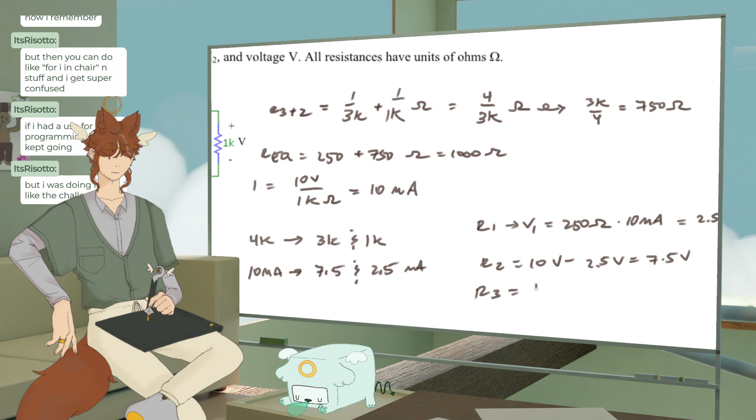Right, V2 equals 10 volts minus 2.5 volts, 7.5 volts. R3 equals R2... sorry, not R3, V3. Very important distinction. So...

Alright, I don't need to do more of this. This is like turn your brain off work. I don't need to do this on stream.

But I hope you guys enjoyed. I will probably be back. So I did my dynamics, it's not due till Monday. I'll be back with curvilinear motion sooner. Oh, thank you for the follow, Arizona.

Yahoo! Yeah, I could come back with some curvilinear motion, some path dependence. That's the TNB frame I was talking about. But I might not be able to do that yet, let me check real quick, because sometimes she doesn't teach us stuff exactly since it's due on Friday, so we might not cover it. But it says curvilinear, oh, we can do some of this for sure.

Tomorrow is Sunday, I have practice and I have a thing. Monday I have D&D, I might be able to stream on Monday, it's a holiday. Curvy motion? Yeah, curvilinear motion. Actually, I'm not sure, well some of these are conceptual, so I can definitely do them.